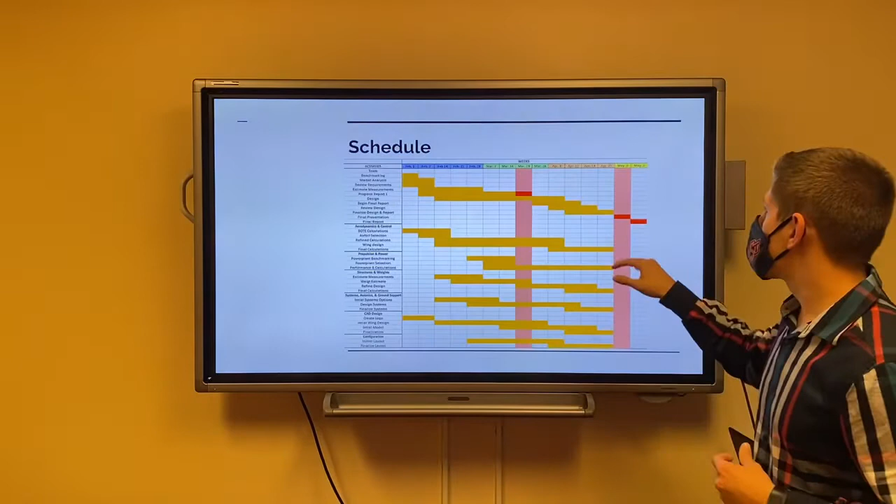So overall, for mission requirements, the general concept is we need to be equal to or better than all the other aircraft that are available today. And then for the flight profile, we're going to be taking off and landing at 9,000 feet. Our cruise is going to be at 60,000 feet for year spans, and then we're going to land every year for maintenance. Schedule, overall, this is what we use for our Gantt chart, and ultimately it's going to end with our design report being due at the end.

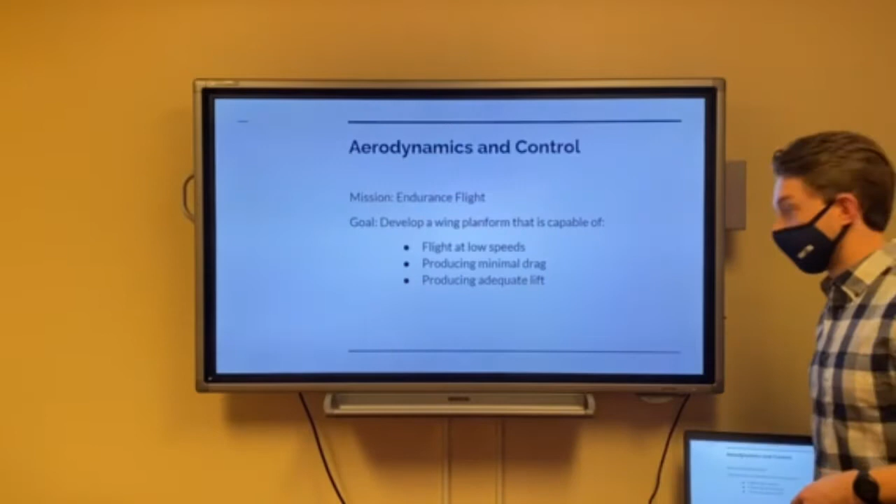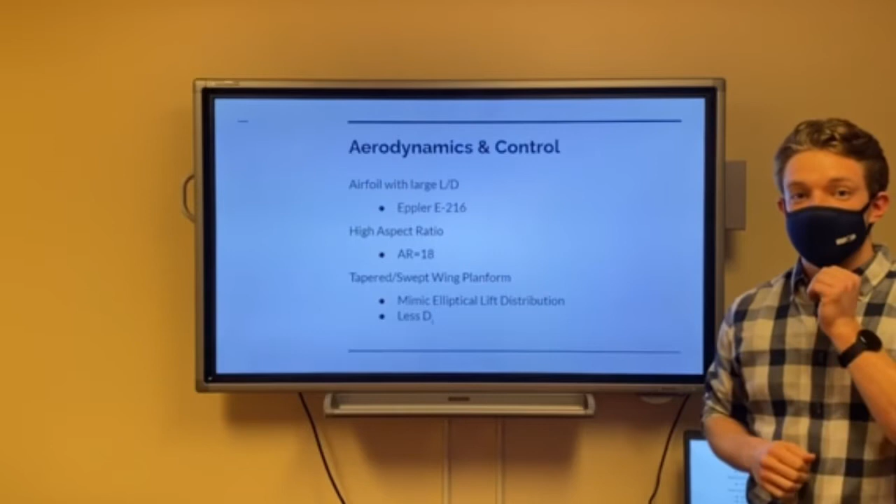So for optimal endurance flight, we're going to be operating at a low power and thus a low speed and a low drag. So with this in mind, our goal for developing the wing planform was to develop something that is capable of all these. So when looking at our airfoil, we wanted to focus on low drag, so a high L/D value. This led us to the Eppler E216. Now for our aspect ratio for endurance flight, we want a higher value. And when looking at our benchmarked aircraft, we came to an estimated value of 18.

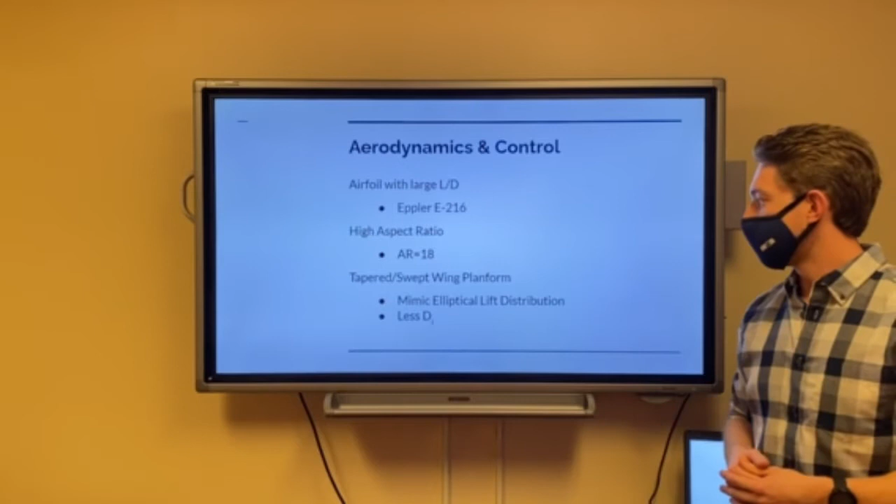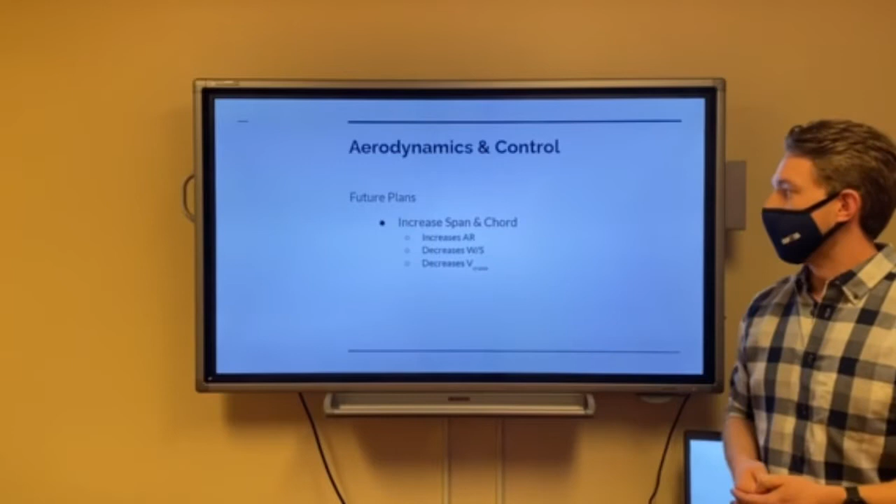Now to mimic an elliptical lift distribution, we came to the conclusion that a tapered and swept wing combination would be ideal, which leads to the benefits of the elliptical lift distribution without the downsides and less induced drag. So for our future plans, we plan on increasing the span and the chord. This is going to lead to an increase in our aspect ratio, a decrease in our wing loading, and a decrease in our cruise velocity.

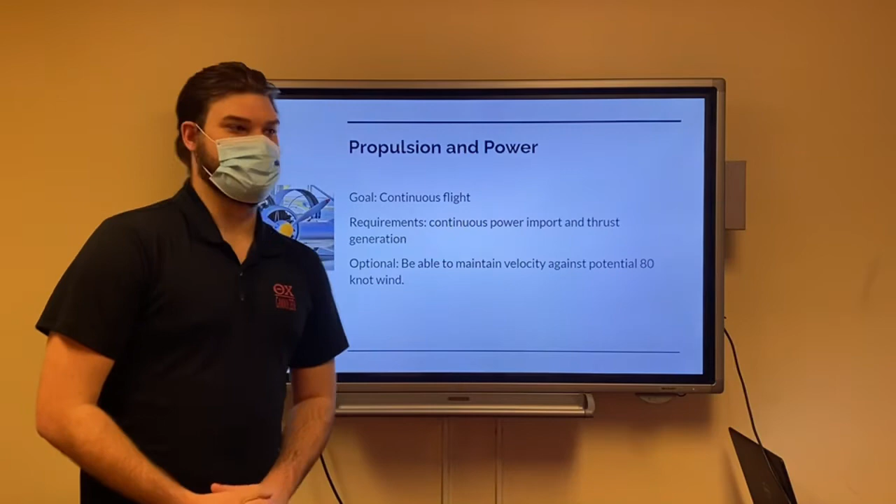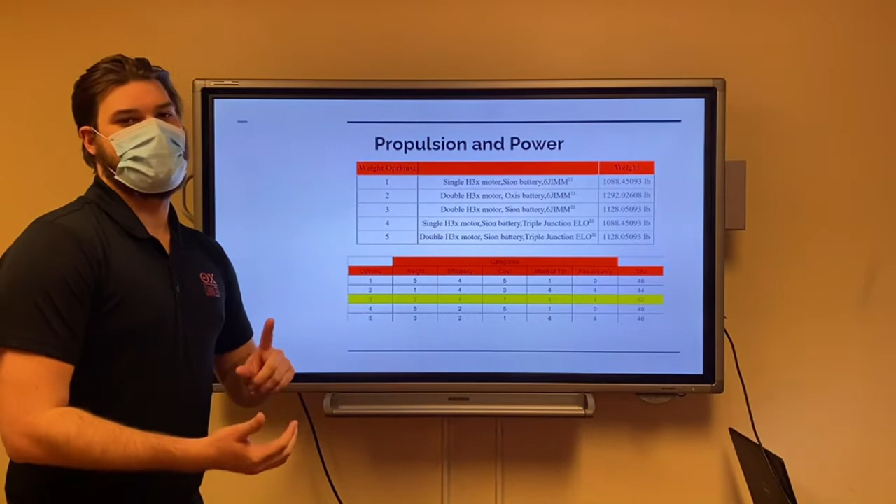Our goal is continuous flight for propulsion. We will complete this through solar panels, batteries, and electric motors. We use a decision matrix with 5 options, and through it we decided that our third with a double H3x motor, Sion battery, and the 6JMM solar panel was the best option. Our future plans are to decide on the propeller due to the fact that we were using perfect propellers for our calculations to start, and to optimize the thrust to weight ratio.

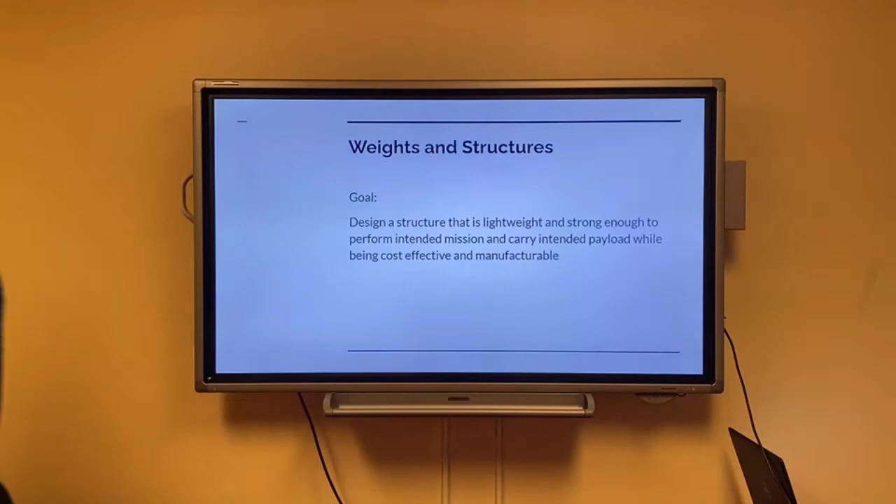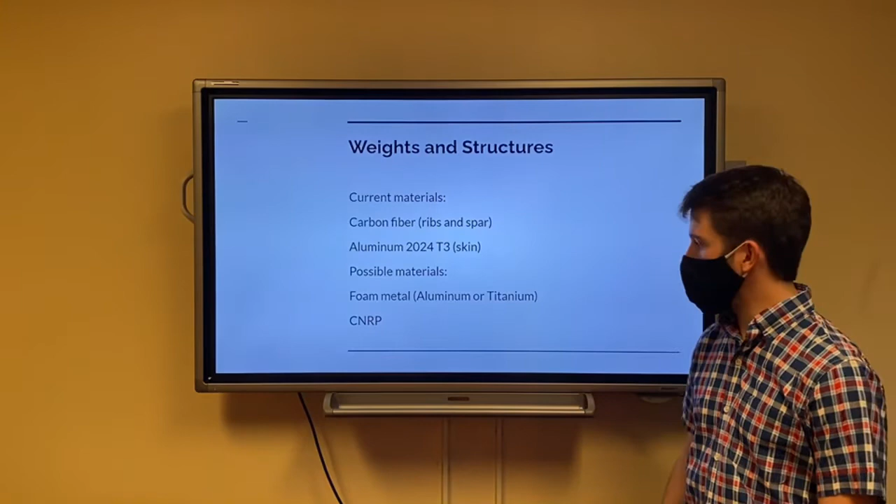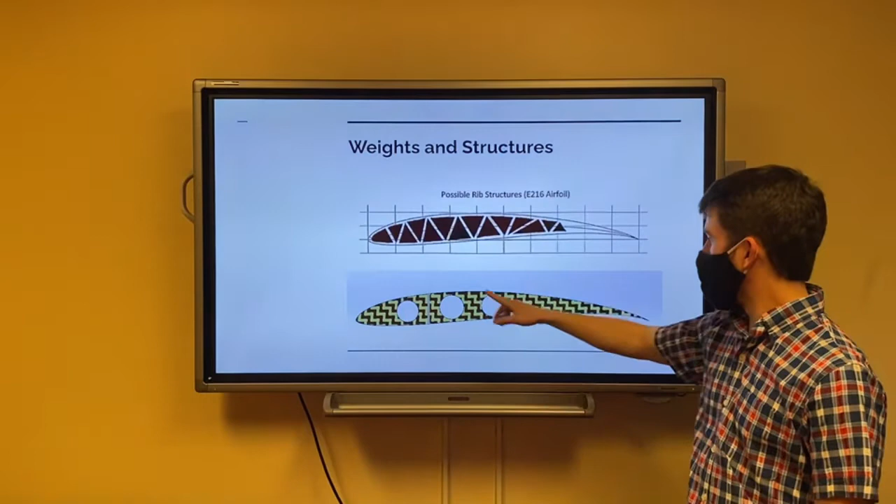Alright, so for weights and structures, our goal was to design a structure that was lightweight and strong enough to endure pretty much any conditions our aircraft could encounter. Our current material selection is carbon fiber for the ribs and spar because it's strong and light, and aluminum 2024 alloy for the skin. Materials that we're considering for future internal structure would be foam metal, where the base metal is aluminum or titanium, and carbon nanotube reinforced polymer. So possible rib structures include this structure with triangular cutouts for the rib, and this structure with circular cutouts for the rib. Thank you.

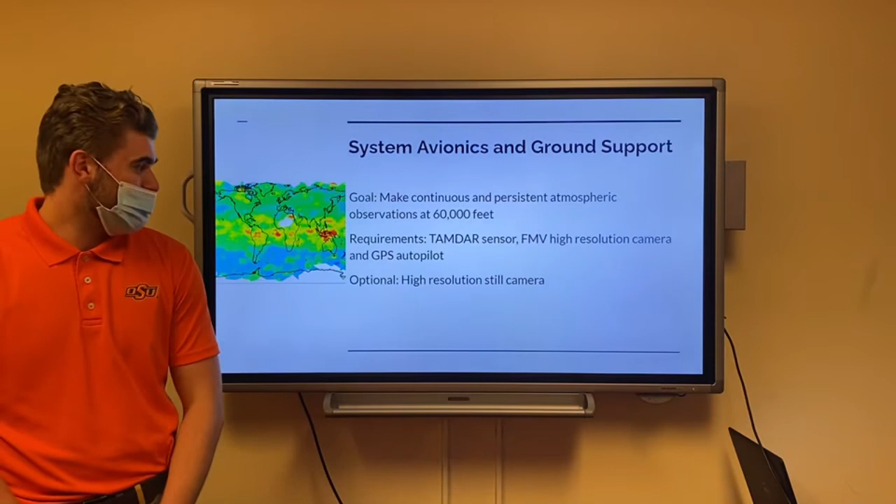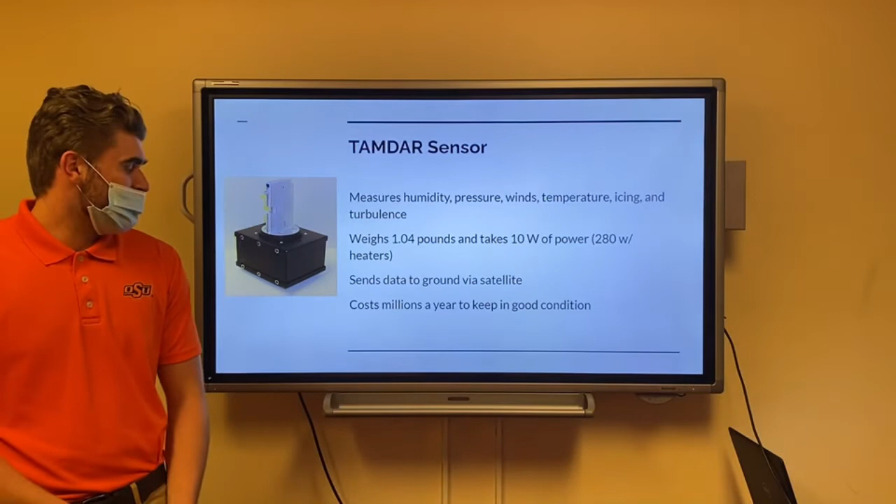The main goal for the avionics was to have consistent and continuous atmospheric observations at high altitudes. And we needed a sensor, an FMV camera, and a still high resolution camera as an optional, along with the GPS autopilot. So the NASA approved TAMDAR sensor measures humidity, pressure, winds, temperatures, icing, and turbulence. It weighs very little and will send all of our data to the ground via satellite. We chose a gimbal camera because it can act as an FMV and still camera for the optional, and it is weather sealed, 360 degrees rotation, and has full HD photos and videos.

The transponder autopilot we picked from Trig is ETSO certified. It functions up to 70,000 feet, and it weighs very little and has full flight system control from the ground.